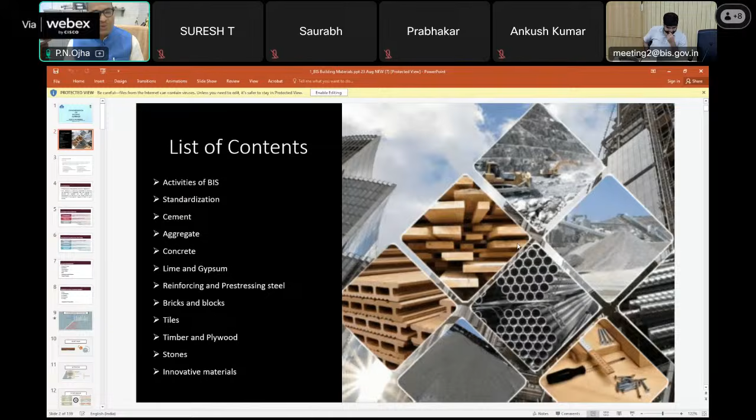So building materials covers numerous types of building materials, and so many standards are available. So I would like to cover everyone so that the participants can read on their own all those standards and can apply them in real life situations. So with this background, activities of BIS, everyone can read it. This slide will perhaps be shared by the BIS to everyone, so I'm not going to read it.

But yes, standard formulation is one of the major activities of BIS. And then BIS has a laboratory recognition scheme also, product certification also, compulsory registration scheme. Apart from this, foreign manufacturer certification, hallmarking, laboratory services, Indian standard sale, then consumer affairs activity and training services and information. All these activities are part of BIS.

So what is a standard? Let's suppose a product is having some desirable properties and some undesirable properties. So those standards, in terms of a quantitative value most of the time, or even if qualitative based on some colors and all that, the desirable and undesirable properties are listed with their values. If it is a desirable property, then it should be more than that. And if it is an undesirable property, then it should be less than that.

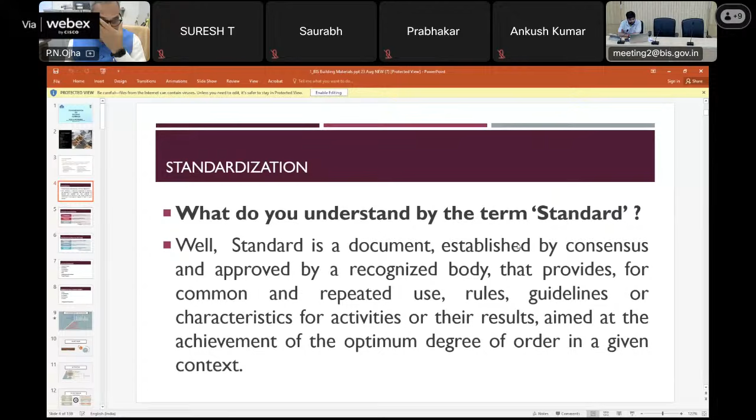So this is the meaning of a standard. When you are using it, those specifications will have to be met, and whether it is meeting them or not, the product will be tested as per a specified test method. These specifications and test methods are available in a standard form to everyone on the same platform, and that's why it is called a standard. One can read this language, but this is the meaning of standard in practical terms.

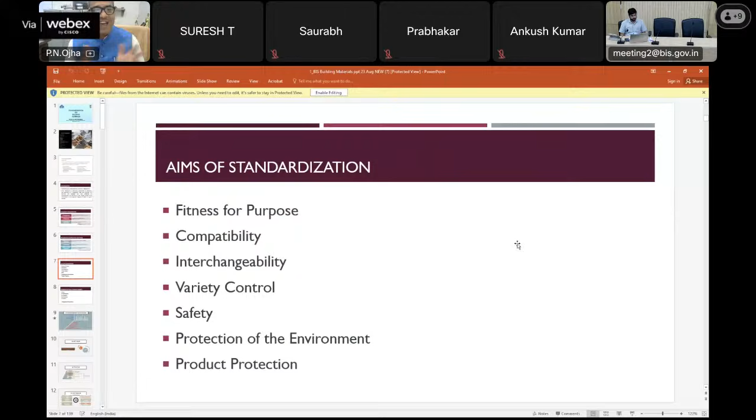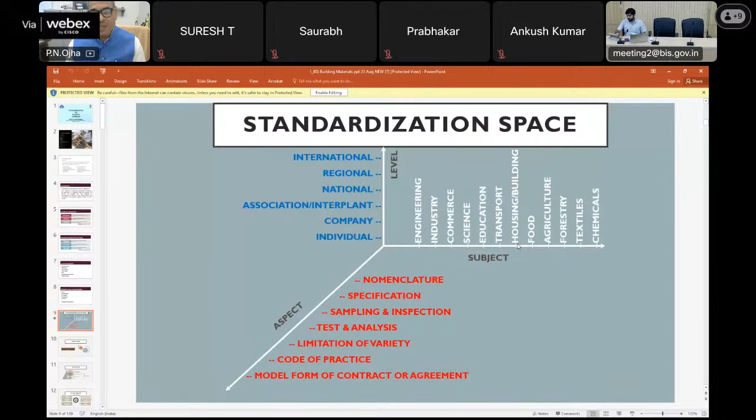Okay, so standardization should have transparency, openness, impartiality and consensus, then effectiveness and relevance, coherence, and development dimension. And the aims of standardization are fitness for purpose, compatibility, interchangeability, variety control, safety, protection of the environment, and product protection. National standards benefit technologies, products, consumers, and traders. So I'm going through all these things quickly.

I am coming to the Civil Engineering Divisional Council. All the civil engineering committees come under this Civil Engineering Divisional Council, CEDC, and yearly or twice a year a meeting happens on in which area which type of standards is needed.

So all the experts from all fields of civil engineering sit together, have the meetings and debate, and based on the consensus view, the standardization framework and future plans are made. So it is the utmost body, CEDC, which gives the suggestions and opinions on in which area the standards are to be made.

Okay, so these are the committees available in the Civil Engineering Divisional Council, right from CED 2, 3, 4, 5, like that. So we have a number, and within this committee, we have a panel. Let's suppose cement and concrete. So we have cement, then concrete. Concrete has various products like aggregate and all that. For standards, let's suppose aggregate has specification, test method, and all that. So we have a panel who will deal with the aggregate. A panel deals with IS 456. A panel deals with the chemical admixtures, like that.

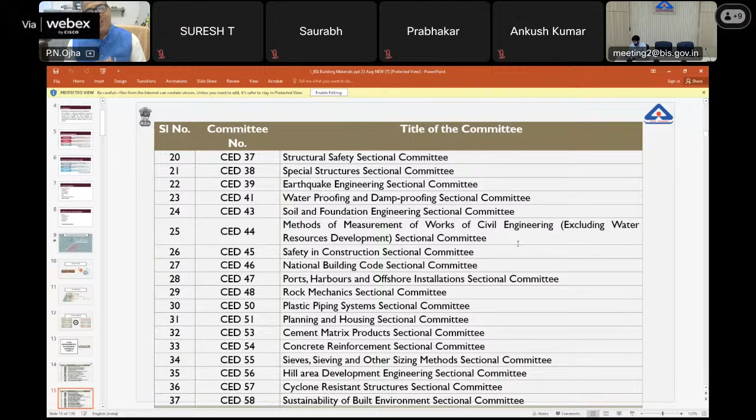So every committee has some panel, and a panel can formulate a working group for a particular standard to be drafted or to be revised, like that. So a standard must be needed, implementable, timely, acceptable, and it should be current.

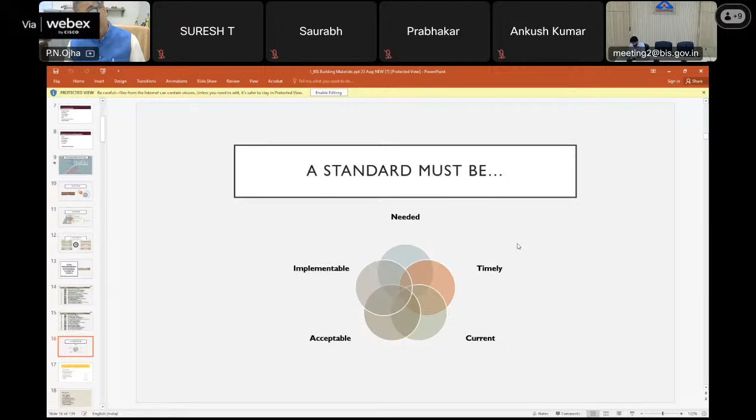So any building material has some properties which we can call physical or mechanical properties. And physical and mechanical properties are the performance in the civil engineering structure. For those performances, let's suppose cement strength or fineness, these are the mechanical or physical properties. And the reason behind those physical properties is the chemical composition.

So when we have any standard, there are some physical properties, their values and their test methods, and there are some chemical properties, their values and their test methods, how they will be determined. Some products should be durable in nature, so durability properties also. And the fourth type of property is how it looks, so general appearance.

And then for testing those products, how the laboratory sample should be picked up. Let's suppose a heap or 1,000 items are there. How many items, and how they will be picked for testing, that is called sampling for conformity. And conformity means when it is tested, it should meet the standard. So sampling for conformity is also available in the product standard.

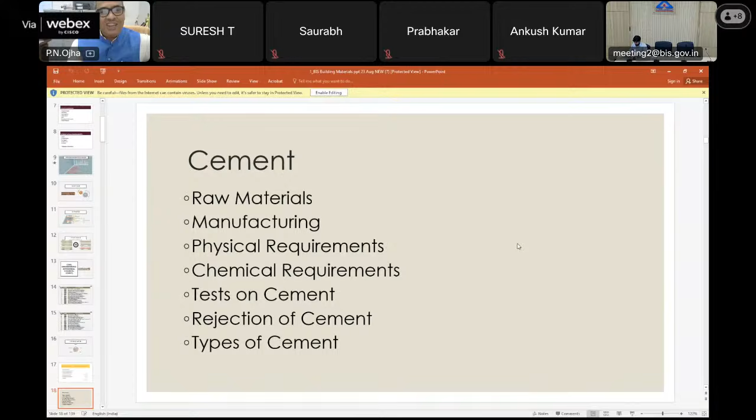And how the sampling will be taken, those are also there - how the bag of cement, what should be the volume of the bag of cement, how it should be sampled out of the available bags. All these clauses are there in each of the standards pertaining to the cement for each type.

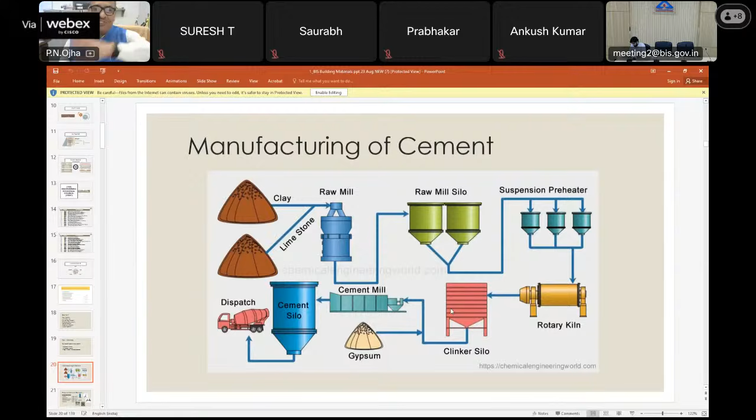And requirement of cement, as I said, five physical property - these are fineness, setting time, compressive strength, transverse strength, soundness. These are the test methods: IS 4031 part 2, part 5, part 6, part 8, part 3. The various parts of IS 4031 are available for physical property or mechanical property, both we can say.

So physical properties of cement - these are the IS 4031 series, the standard test methods for testing physical properties of cement.

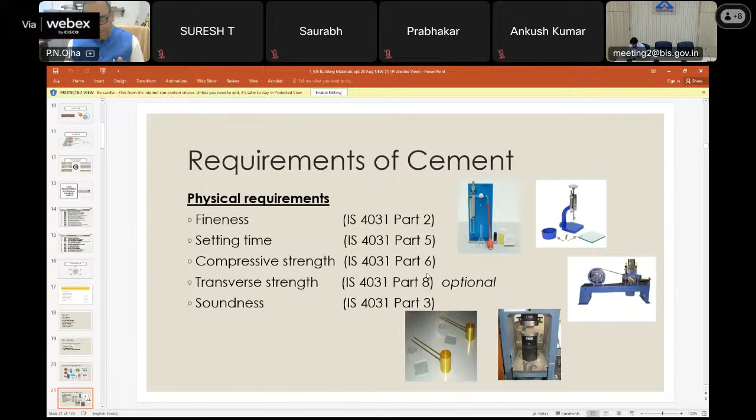And IS 4032 is the test method standard for testing chemical properties of cement in terms of LSF, insoluble residue, magnesia, sulfate content, loss on ignition, chloride content, alumina, iron oxide, etc.

Okay, so this is the specification standard, those are the test standard. This is the specification standard for OPC, IS 269. Those values are mentioned - one can see it in this standard. Open it out and see.

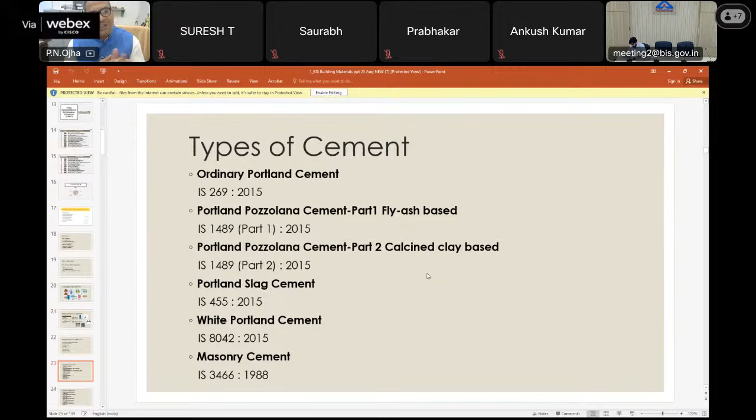Then IS 1489 for PPC, which is calcined clay based, and earlier part 1 was fly ash based cement, which is mostly available in India. Then Portland slag cement IS 455, white Portland cement IS 8042, and masonry cement IS 3466. It is rarely manufactured - manufactured by cement plants on demand.

Then sulfate resisting Portland cement IS 12330, high alumina cement for structural use IS 6452, super sulfated cement IS 6909, rapid hardening Portland cement IS 8041, high alumina refractory cement IS 15895, hydrophobic Portland cement IS 8043.

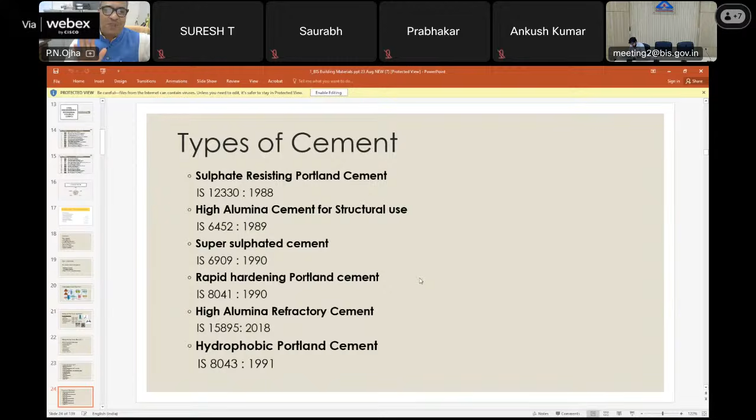So all these are the specification standards of cement of various types. Again, the list is low heat Portland cement IS 12600, oil well cement IS 8229, composite cement IS 16415, microfine ordinary Portland cement.

IS 16993, Portland calcined clay limestone cement, IS 18189. So all these are the specifications of cement.

And rejection of cement, as I said, cement is supplied in bulk storage and bulk bag, but when non-compliance with relevant standards, then it can be rejected. If it is more than 3 months, it should be tested again, and if it is not meeting the criteria, it must be rejected. So these are the rejection criteria mentioned in the specification standard.

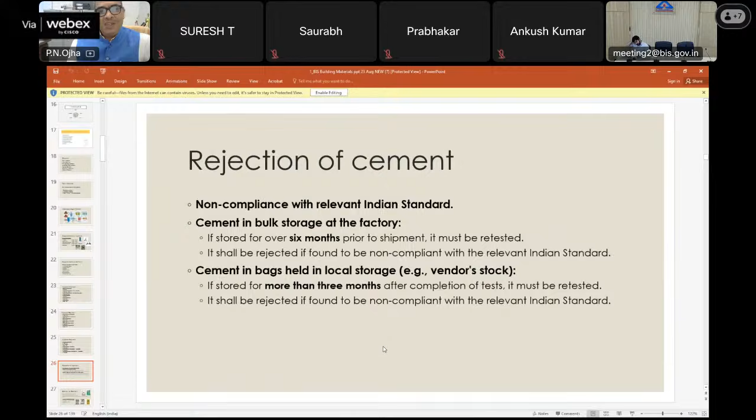And delivery of cement, generally 50 kg bag, but sometimes 25 kg, 10 kg, 5 kg, 2 kg, 1 kg are also in standard. But this happens in case of white cement, generally not in case of gray cement.

Printing of the type of cement - if it is black color, you can see it is in case of OPC and white cement. In case of PPC, the writing should be in red color. This is very, very important to recognize from a distance.

And in orange color, when it is PSC, you can see the bags and the writing color on the bags. So one can recognize which kind of cement, which type of cement is in the bag right from a distance - you will not have to see which kind of cement it is.

So, and the bag should have on each bag the week, month, and year of packaging before the best before date. This should be there, so one can easily recognize when this cement has been manufactured and which type of cement it is - one can recognize from the bag.

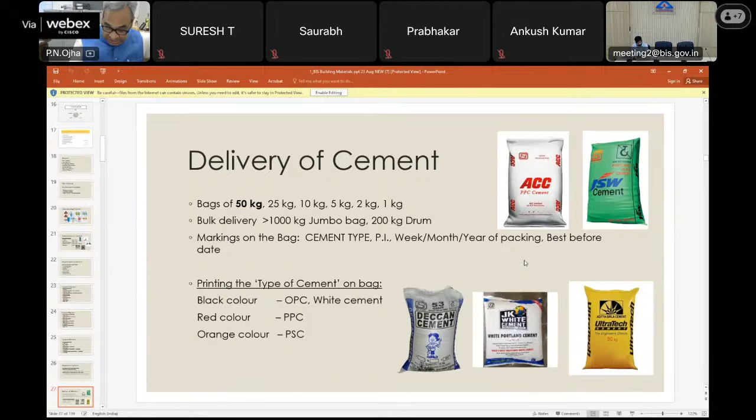So now coming to the second material of concrete, aggregate. Aggregate is of two types. We can see coarse aggregate and fine aggregate based on the size, but based on where it is coming from, aggregate can be from natural sources and aggregate can be from industrial byproducts or C&D waste or some industrial process.

So we have classified in the coming standards of aggregate. We are revising the standards on aggregate, and we have defined the type of aggregate based on the sources - natural aggregate and aggregate from other than natural sources. And lightweight aggregate is altogether a different category, which is light in nature.

And waste-based aggregate is not the right word here. We can call it industrial byproducts. C&D waste now is not a waste, it is a resource material. When we are processing the C&D waste, those aggregates are being called C&D waste-based aggregate, RCA and RMA, like that.

So IS 383, presently IS 383 2016 defines the coarse and fine aggregate both, and this covers all the properties. But for your information, IS 383 is being revised. It will be available in 3-4 months. It is in the last stage of revision. I am the convener for that revision.

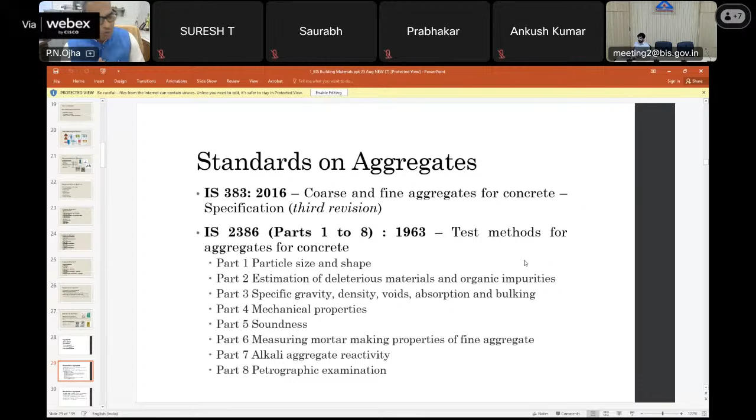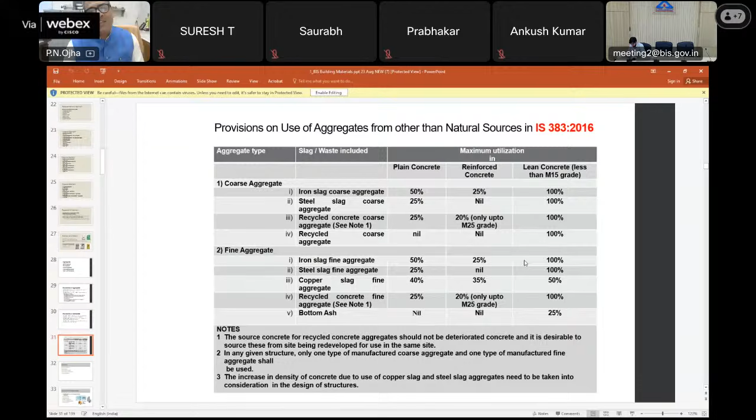Now, concrete mix proportioning. So the aggregate is there, then cement is there, we have discussed. Then chemical admixture - for your knowledge, there is a standard for how to evaluate the chemical admixture, and that is IS 9103. 9103 is also under revision, and right now it is available in one part.

After revision - revision has just started - it will come in 7 parts, and it will cover right from the super plasticizer to air entraining agent to accelerator, retarder, set retarder. Then we can call it shrinkage reducing agent, then corrosion inhibitor, then permeability reducer. So all these types of chemical admixtures will have a specification, test method, and evaluation process for how it should be evaluated.

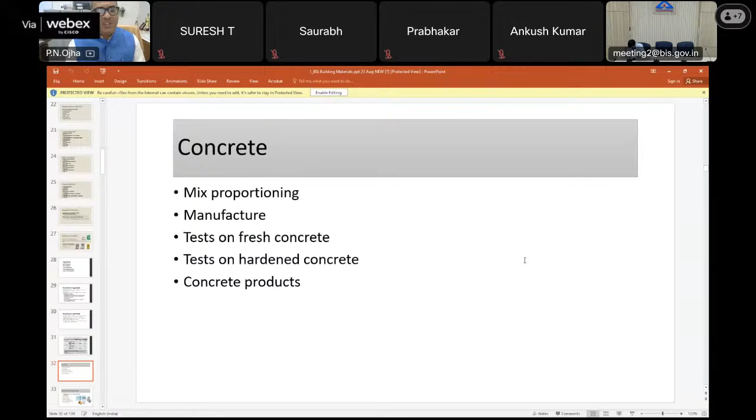So that chemical admixture, cement, and aggregate combined together - we are going to make concrete. So how to mix proportion, how to decide the mix proportioning, how to manufacture the concrete, what are the tests on fresh concrete property, what are the tests on hardened concrete property, and how concrete products are made - this is the thing.

IS 10262 is the method for concrete mix proportioning. IS 10262 2019, and it covers the test mix design procedure for ordinary grade, standard grade, high strength grade, self compacting concrete, mass concrete, all this.

So how the water cement ratio will be decided, how the target mean strength calculation is done, then according to the target mean strength, how to select the materials, then water cement ratio, then calculation of water, then calculation of cement, then calculation of volume of aggregate separated in two parts - coarse aggregate, fine aggregate - multiplying by specific gravity, coming to the quantity of fine aggregate, quantity of coarse aggregate, then calculation of all those components, then casting the cube, then looking at it to see whether it is meeting the requirements.

All these procedures are mentioned in IS 10262 for all types of concrete, and based on that, this is a guideline. This is neither the specification nor the test method. It's a guideline for concrete mix proportioning. It is not strictly to be followed, meaning a little bit of deviation will not mean concrete doesn't pass or concrete fails. It is not like that. That's why it is being called a guideline for concrete mix proportioning.

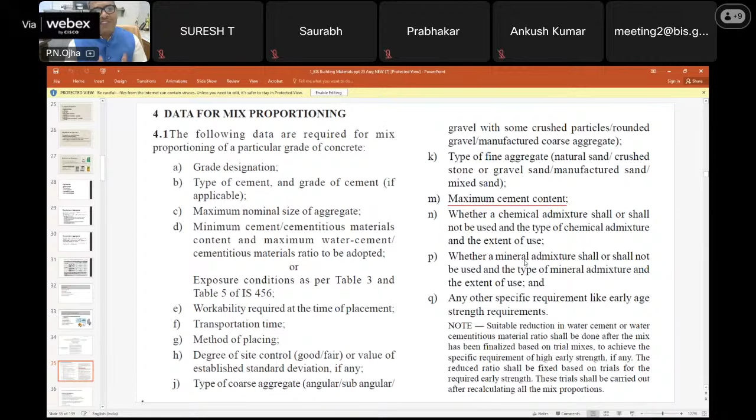This is the steps you can go through. I have already explained selection of water cement ratio, air content, then water content and admixture content, then cement and cementitious material, coarse aggregate proportion, then different coarse aggregate fraction, then estimation of fine and coarse aggregate, then trial mixes. Illustrative examples are also mentioned at the end of the standard guidelines. Following this, one can design the concrete mix proportion.

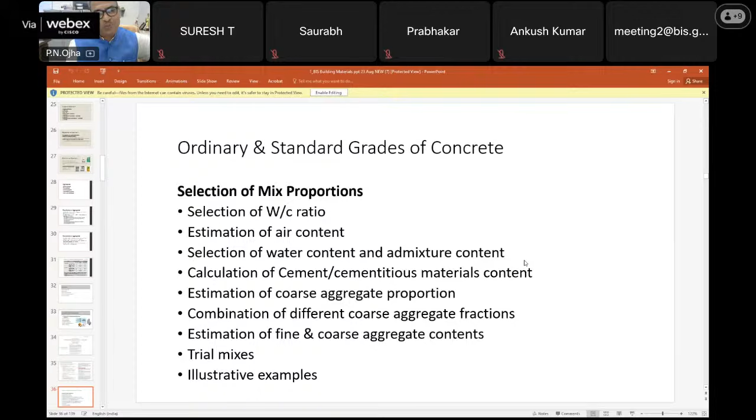For high strength grade, a little bit different how to select the materials, but the procedure is almost the same, with a little difference in the values, in how to select.

This is self-compacting concrete. The features are passing ability, which is tested as per L-box - there is a standard available in IS - and filling ability, segregation resistance, and viscosity. These are the four properties available in the fresh concrete state for any self-compacting concrete.

According to this, when a self-compacting concrete is made, the trial is made after calculation and following IS 10262, then these tests are done in the fresh state. When these are not meeting the specifications fixed by the user, there should be adjustment in the concrete mix proportion like this. How the mix proportioning should be done, the approach has been written in 13 steps, and one can follow.

The premise of IS is that the fine content should be in the range of 400 to 600 kg per meter cube of concrete. What is the fine content here, or powder content? It's the materials finer than 0.125 mm. Water content should be 150 to 210 for self-compacting concrete to be designed. It is essential to use high range water reducing admixture when designing self-compacting concrete. But only when anyone actually designs it will they understand the tricks and art of designing self-compacting concrete.

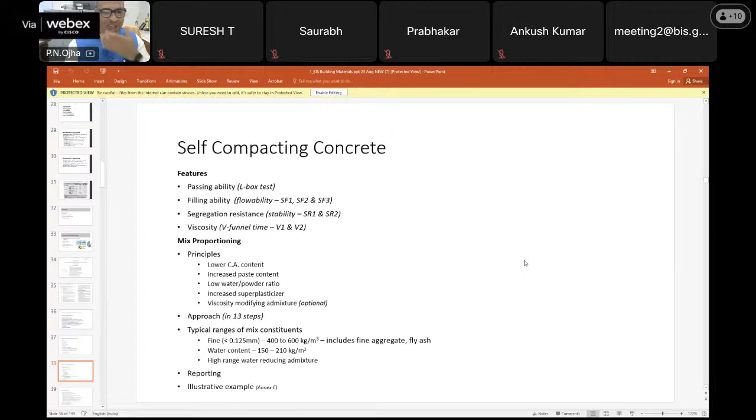For mass concrete, again the procedure is almost the same, but one thing is different. When the maximum size of aggregate is 80 mm or 150 mm, for target strength calculation, FCK plus 1.65 into standard deviation, whatever comes will be multiplied by a factor - 1.2 for 80mm, or 1.25 for 150mm - to achieve the concrete mix which is sieved on the 40 mm sieve, because we cannot cast a cube of 80 mm or 150 mm maximum size of aggregate, and testing facility will also not be available. So cubes are cast after mixing, after removing the 40 mm plus aggregate from the concrete mix.

This is the difference. Other things are almost the same, but only when one designs it will they understand the difference in mass concrete. One more restriction is there should be sufficient mortar content when 80 mm plus or 150 mm plus maximum size aggregate is designed.

Especially these types of concrete are used in dam construction. Mass concrete is also used in high thickness foundations, like if a foundation of a 100-story building has 2-meter thickness or 1.5-meter thickness, that can be called mass concrete, and that becomes tricky because of the temperature generation in the core of concrete. How to control the temperature - all these tricks and arts, all these standards are available. One will have to study mass concrete in detail.

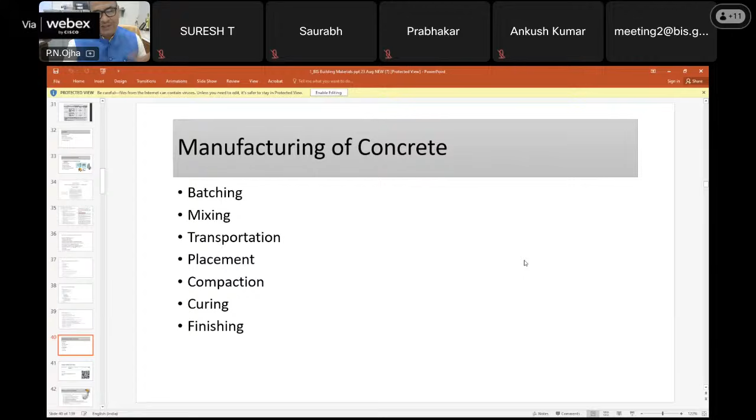So ready mix concrete, we have a standard IS 4926, but ready mix concrete is nothing but concrete produced in the batching plant. If I am selling the concrete, I have a batching plant, but I don't have a project, I am selling the concrete for individual house builders or any project, then that plant is called a ready mix plant. And if I have my own project, and for my own project I have a batching plant, then it is called a batching plant.

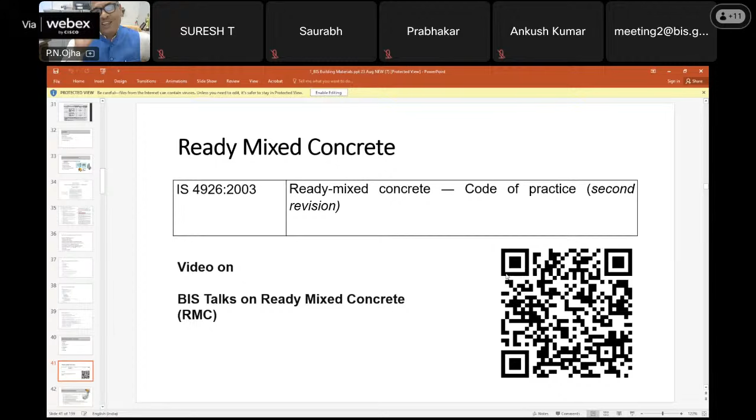Okay. So how the concrete is manufactured, a little bit of other terms, the quality control and all those things, are mentioned in this standard. So one can go through IS 4926. This is specifically the ready mix concrete standard, but it is not a specification standard. Again, this is a code of practice. You see, ready mix concrete, code of practice. It is not a specification standard. As I said, standards are of three types: specification, test method, and code of practice or guidelines.

Okay. So right now this is fresh concrete, how to test the fresh concrete for various properties, because fresh concrete properties are very, very important. So sampling, then consistency of fresh concrete, density of fresh concrete, air content, then making and curing of test specimens, then self-compacting concrete fresh properties, as I said, passing ability, segregation resistance, all those properties we have in part 6. Then part 7, setting time of concrete by penetration resistance.

In part 8, water soluble and acid soluble chloride. This standard is under development. I am the convener for this also, IS 1199. So we are working on this. And then analysis of freshly mixed concrete. This is also under development. Okay. So one will have to see these standards to test the fresh concrete properties. And how it looks like, one can see part 1, then part 2, one should go through it.

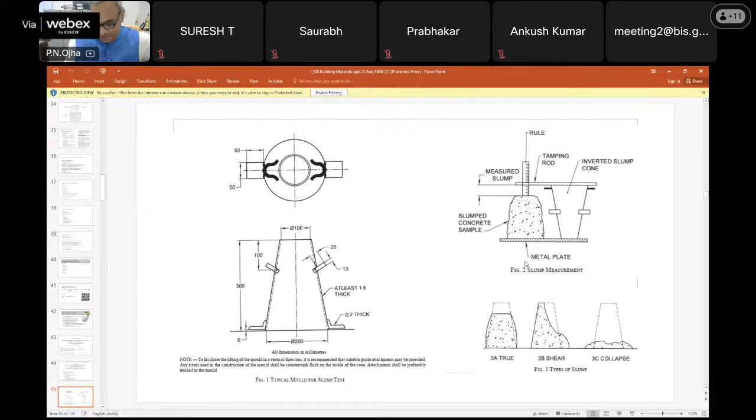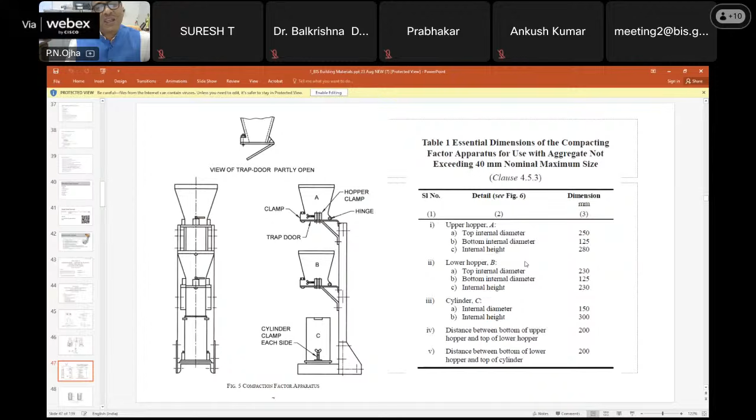Then this is slump, how the slump is measured, when it is called true slump, shear slump, and collapse. So one can see, and one should relate these figures when you are testing in the laboratory or at site. Okay. So this is a Vee-Bee consistometer. When the concrete doesn't have a flowable property, almost dry in nature, the slump test is not a valid test. So we test it with the Vee-Bee consistometer test. And this is a compaction factor test. Normally these tests are not being used nowadays.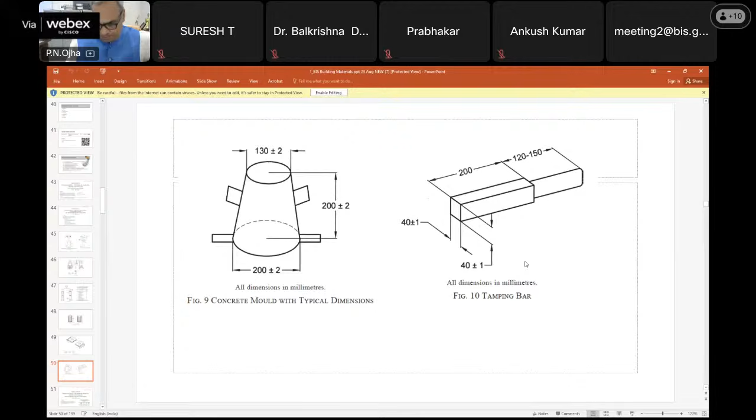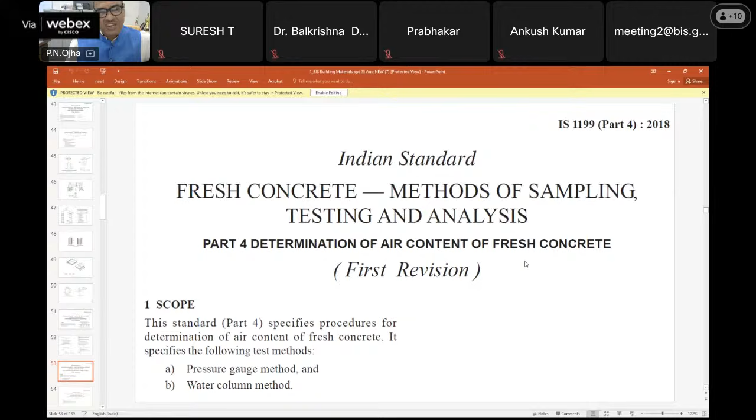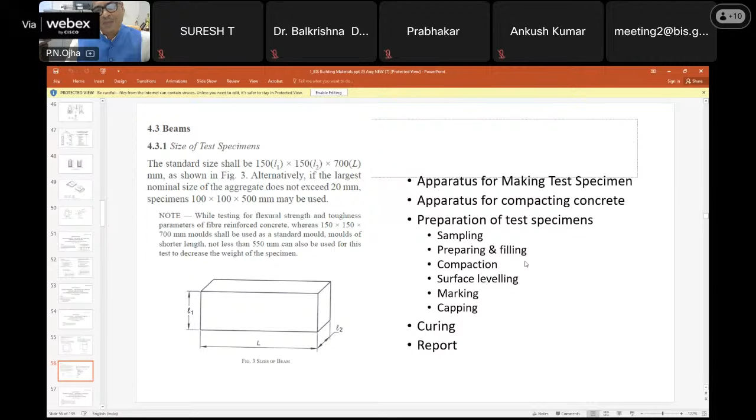Then making and curing of test specimens, part 5, how the cube specimens are made, how the cylinder specimens are made, how the curing is done for the specimens. These are very, very important while making any concrete structure. Then tests on fresh self-compacting concrete, various tests, then setting time of concrete, penetration resistance, and then tests of hardened concrete. So these are the set of tests.

One is testing of strength of hardened concrete, and these tests are compressive strength, flexural strength, and split tensile strength. Then other properties like density of hardened concrete, then depth of water penetration test, initial surface absorption test. This is one of the durability indicators. The earlier one, the water penetration test, is also a durability indicator. Oxygen permeability index, this is also a durability indicator test. Then determination of carbonation resistance. Carbonation is one of the problems of concrete from a durability point of view. Okay, so carbonation resistance test.

Then part 3 explains making, curing, and determining compressive strength of accelerated cured concrete. So when we want a prediction of 28 days strength early, within 2-3 days, we have an accelerated test, and there is a method. This is under development right now. This standard is available for OPC only, and it is very, very old. So we are going to revise it. I am also the convener for IS 516, so we are doing it in the committee. And how to sample, prepare, and test concrete cores, this is also available. And various non-destructive testing for evaluation of concrete structures.

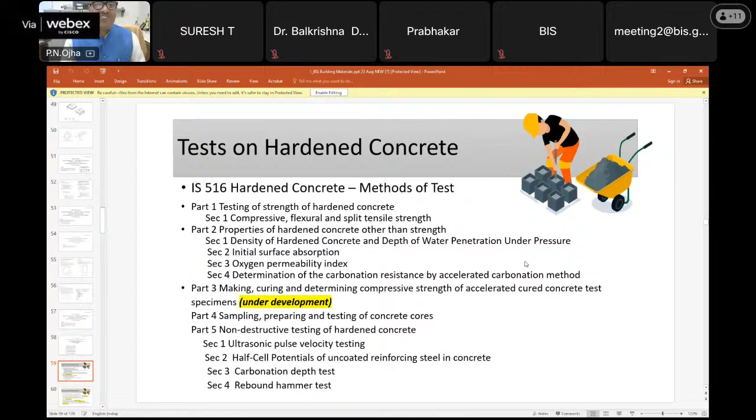And the rebound hammer test is based on the rebound from the concrete surface, and to some extent it can be related to the strength of concrete, but it should be interpreted along with the UPV and the core test. So this rebound hammer test: how to do it, how to make a grid, and how to interpret the results. For all these tests, a series of IS 516 standards is available.

Okay, and this is the hardened concrete method of test. One is drying shrinkage and moisture movement. Second one is creep of concrete. Creep is an important property. This is also under development. We have a standard on how to determine modulus of elasticity, and we have static modulus of elasticity, but section 2 is under development.

Determination of wear resistance, this is also under development. Determination of bond in reinforced concrete, bond of reinforcing bar, which is a very, very important property. This is also under development. And determination of Portland cement content. It is an ambiguous issue whether we will be developing it or not, but this is also under development.

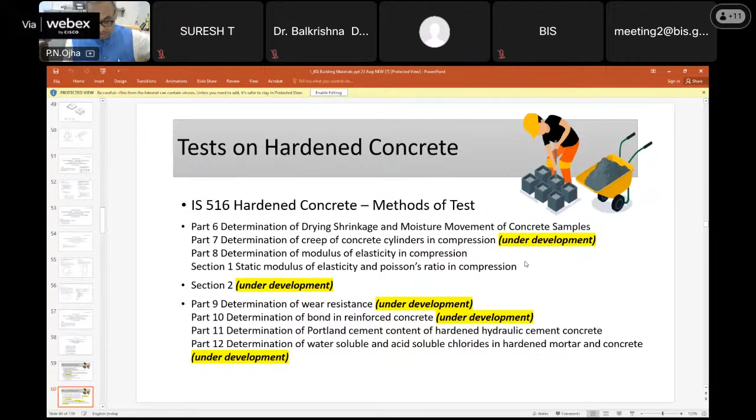And determination of water soluble and acid soluble chloride in hardened concrete. A standard is available, but this is also under development because it is not being used properly. Okay, so this is the set of the IS 516 series. So this is how these tests look, as I have explained. This is the first page of each one, so one can go through these standards.

Test methods. And concrete is mostly used in residential buildings, dams, reservoirs, bridges, foundations, high-rise buildings, rigid pavement, RCC paving blocks, concrete sandwich panels, etc. Okay, but concrete is concrete. It can have a difference in fresh concrete property. It can have a difference in hardened concrete property. Hardened concrete property means strength and strength-related properties.

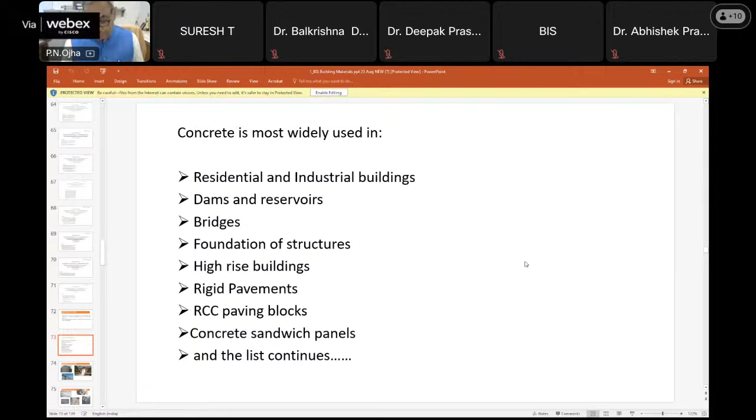What is strength? You know, clear strength, and strength-related properties mean creep, elastic modulus, Poisson's ratio, drying shrinkage, all those things. And what is the durability property? All those things may differ, but concrete is used in all these applications. Application of concrete: dam.

Now come to the other part. Concrete is over. If anyone has questions, one can ask. It is going to be 5 o'clock. I will have to complete in half an hour.

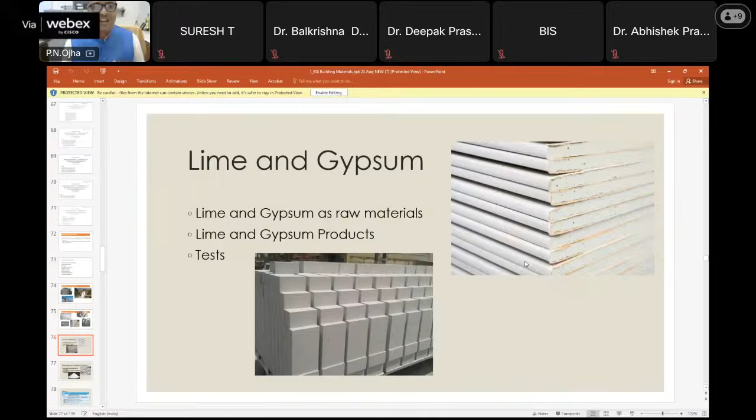So lime and gypsum. This is also raw material for producing different products. We have a set of specifications, and it has a separate committee. Whatever I have discussed till now comes under CED 2. Lime and gypsum come under a different committee, and it has standards such as the specification for building lime and byproduct gypsum for construction. So we have a separate standard for that.

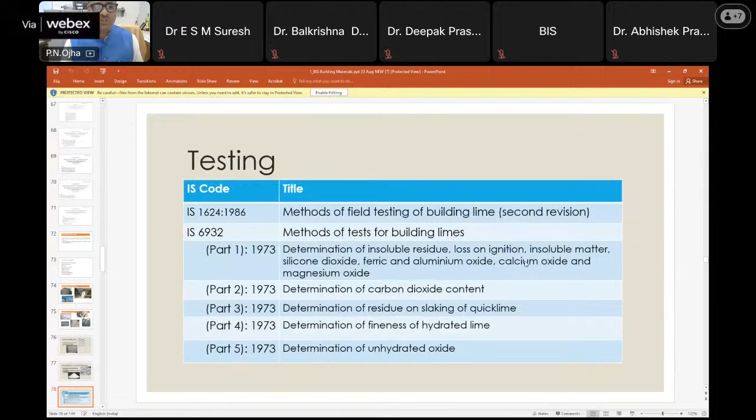And gypsum board you might have seen, and gypsum is also used in cement making, as I have explained. So we have standards for all those things. These are the testing methods, separately, because lime and gypsum have to be tested in a little bit different way. So we have a set of tests, just like for cement we have 4031 and 4032. Okay, so one can see this: part 1 to part 11 we have the test method.

And separately we have IS 2542 part 1, section 1 to section 14. So here we have the series for gypsum plaster, concrete and products, method of test for plaster and concrete. And then other 4 standards: 4098 for specification of lime pozzolana mixture, 3115 for lime based blocks, 4139 calcium silicate bricks, and 15648 pulverized fuel ash for lime pozzolana mixture application. These are specification standards, not test method standards.

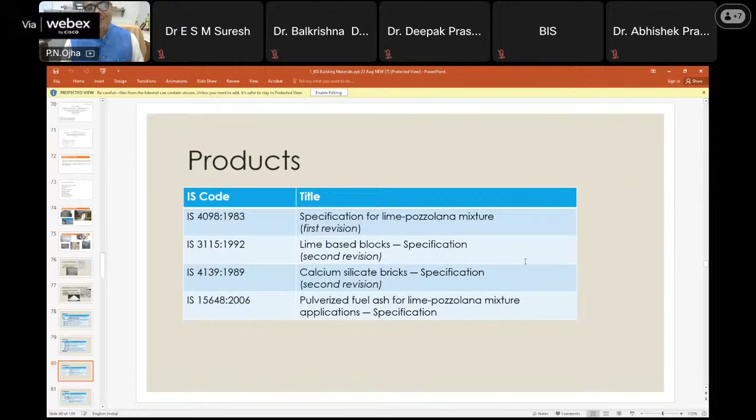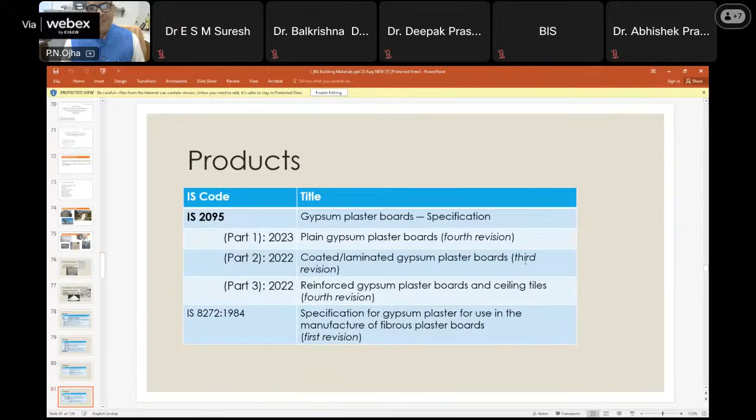And the other part is IS 2095 part 1, part 2, part 3: plain gypsum plaster board, coated laminated gypsum plaster board, and reinforced gypsum plaster board. So this committee also has products in it, and these are the specifications of the products. And IS 8272, a specification for gypsum plaster for use in the manufacture of fibrous plaster. Those 3 are without fiber; if we add fiber, it becomes fibrous plaster. Okay, and now we come to bricks and blocks.

So what is the raw material, manufacture, dimension, physical test, chemical test. There are a variety of bricks, and we have a specification for all of them, and a variety of blocks, so concrete blocks also. So this is another CED, civil engineering division.

And these are the bricks: IS 1077 common clay bricks, which we usually see. Then burnt clay hollow bricks, where there is a hollow space inside the brick. Then a specification for sewer bricks, a specification for burnt clay soling bricks, then burnt clay fly ash building bricks specification. Then IS 12894 pulverized fuel ash lime bricks, 16720 fuel ash cement bricks, and 1725 stabilized soil blocks used in general building construction. So these are all the specification standards.

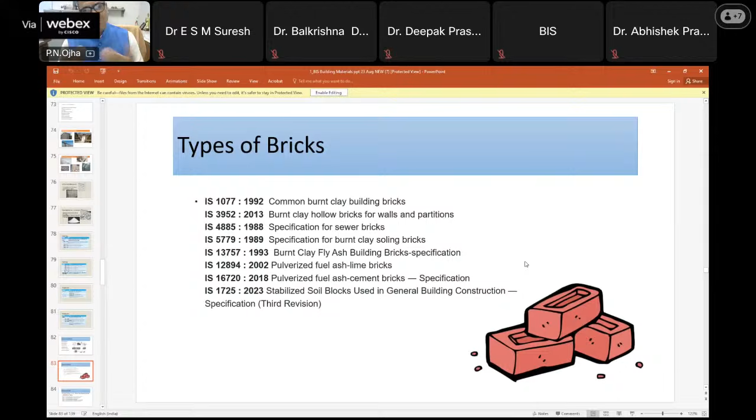And test methods are mentioned, particularly which test is to be done, in the specification itself. Wherever a separate standard is available, a separate test method is there. But if a separate test method is not available, test methods are attached in the appendix of every one. So a specification and some test methods also.

Now IS 3495 part 1 to 6, burnt clay building bricks method of test. As I said, these test methods are available separately from part 1 to part 6 for various properties: compressive strength, water absorption, efflorescence, warpage, initial rate of absorption, and modulus of rupture. So these are the tests on burnt clay bricks. We have a set of standards for test methods, and the values are in the specification standard.

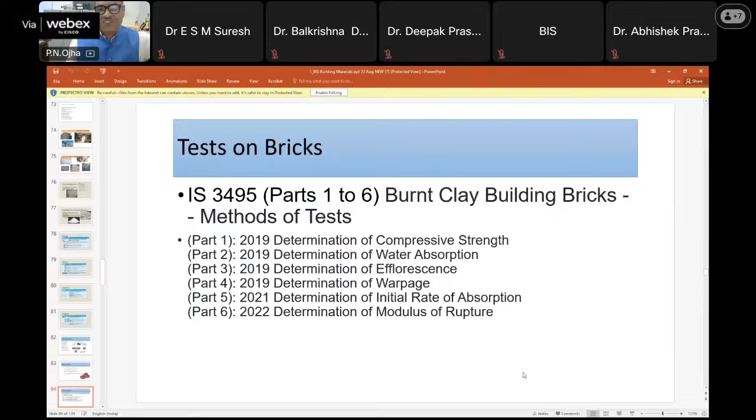Then tiles. We have different types of tiles: ceramic tiles, porcelain tiles, mosaic tiles, etc. They can be glazed or non-glazed. So a variety of tiles is available, specification standards are there, and similarly test method standards are there, and one can follow them for a particular type of tile. So you can see there is a standard for roofing slate tiles.

Another is 2690 burnt clay flat terracing tiles, part 2 handmade, and IS 3951 hollow clay tiles for floors and roofs. IS 3367, burnt clay tiles for use in lining, irrigation and drainage works. IS 13317, clay roofing country tiles, half round and flat tiles. So these are the specification standards for these types of tiles.

And not only the tile standards, there should be 2-3 slides more on tiles. There are test methods, and there are glazed tiles, ceramic tiles also. Since this is not exclusively being covered, one can go through it. Okay.

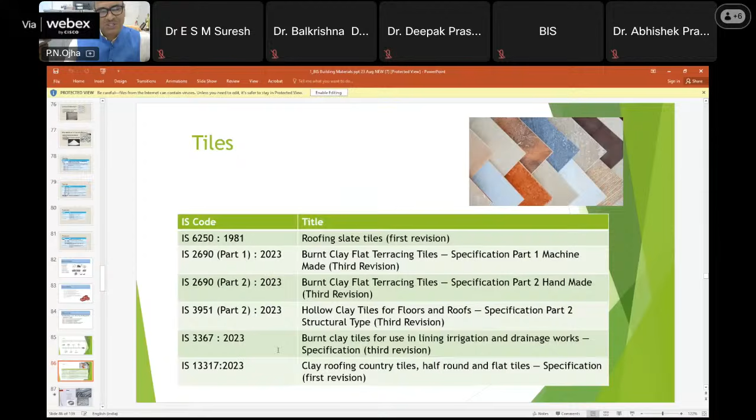Steel can be reinforcing steel for concrete. Steel is used in pre-stressing, so pre-stressing steel, and there are methods of testing. The third use of steel is directly as structural steel, and then how it is manufactured and what its mechanical properties are. So we have CED 54 dealing with steel, a separate civil engineering division which works on the formulation of standards for all three: reinforcing steel, pre-stressing steel, and structural steel, and test methods also.

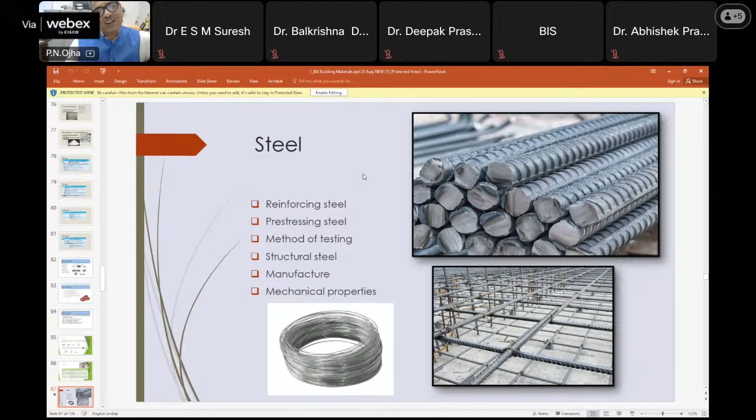Now, recently we have formulated a standard for glass fiber reinforced polymer bars. That is not steel, but it also comes under CED 54. So reinforcing steel can be mild steel or HYSD bar, and how it looks like. So IS 432 part 1, IS 432 part 2, and IS 1566 1982. All these are under revision.

The most important one that generally comes across to us while construction is taking place, particularly reinforced concrete, is IS 1786 2008. This standard is available, but it is also under revision. Very shortly a new standard will be there, which will not be clumsy. I am a member in this. So it is being revised in a simple form, and soon it will be available for use. But this is very, very important.

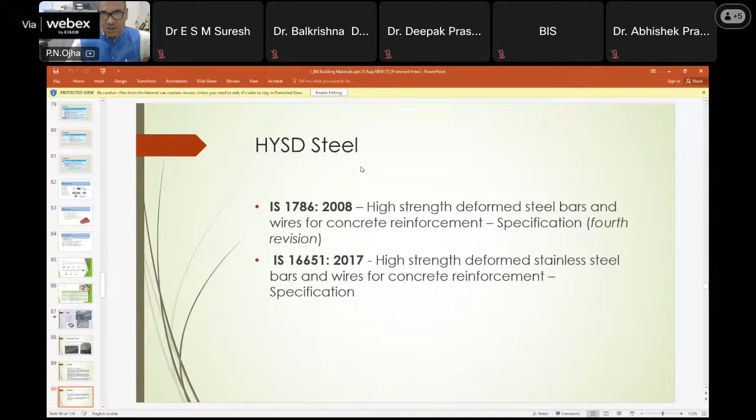Now, 13620 fusion bonded epoxy coated reinforcing bars. Methods of joining steel: welding, for which there is a standard IS 9417, and mechanical couplers. So there are two ways of joining reinforcement: one is welding, the second is using a coupler. For couplers, we recently brought a standard, IS 16172, in 2023.

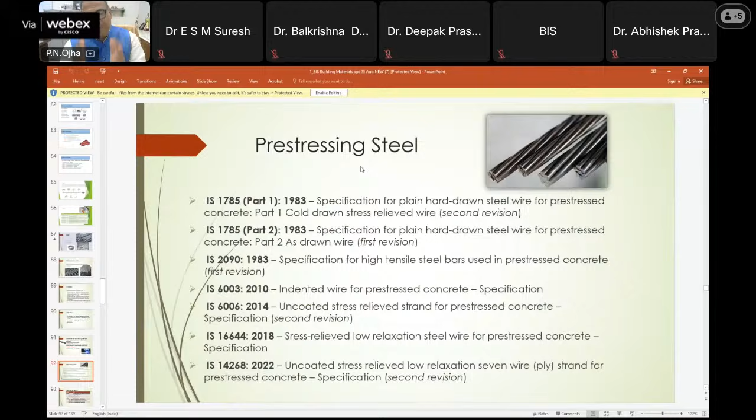And then for pre-stressing steel, we have IS 1785 part 1, part 2, then IS 2090, IS 6003, 6006, 16644, and 14268 for various usages. One can go through them because there are small differences in each of them. And then method of testing, which is very, very important. IS 10790 is the method of sampling of steel for pre-stressed and reinforced concrete. Part 1 is for pre-stressing steel and part 2 is for reinforcing steel.

So, 10790. And the series of IS 1608, the metallic material tensile testing, particularly this is tensile testing. Part 1 deals with the method of test at room temperature. Part 2 deals with method of test at elevated temperature. And part 3 deals with the method of test at low temperature.

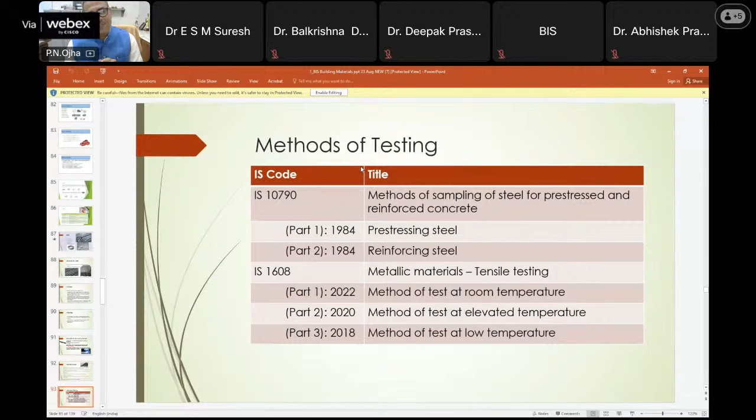So what do you mean by tensile testing? Means ultimate strength, tensile strength, yield strength, and elongation. So all these, elongation at peak stress, all these parameters are available while adopting this test method IS 1608. Okay.

IS 800. Now coming to the special publications for steel, SP6 part 4, use of high strength friction grip bolt, part 5, cold formed light gauge steel structures, and part 6, application of plastic theory in design of steel structures. Okay,

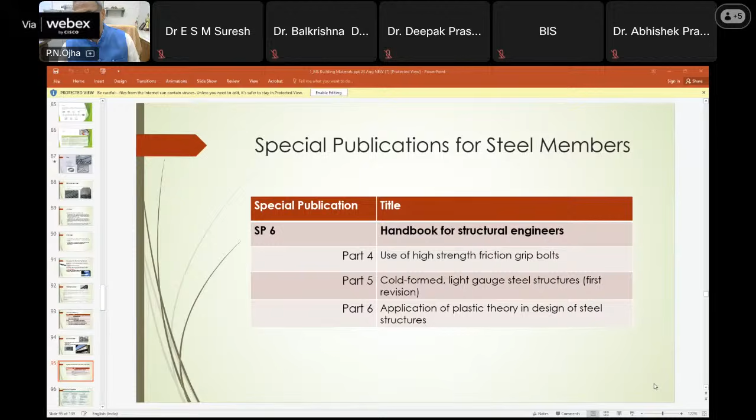Now, other, as I said, IS 432 part 2 and IS 1786, there is a comparison, but first and second is also under revision. IS 1786 is also under revision. So let us not compare it right now. Revision comes. 1786 will come very soon.

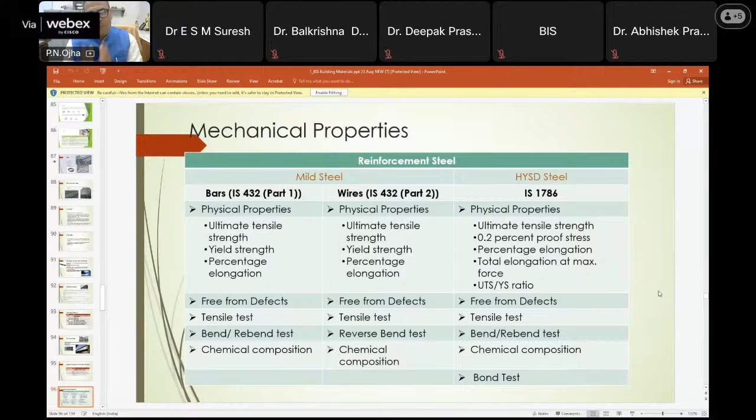Wires, we have a standard IS 6003, and strands, there is a difference between wires and strands. Strands are pre-stressing strands, and one bar can be called bar, and strands can be a set of wires. Okay.

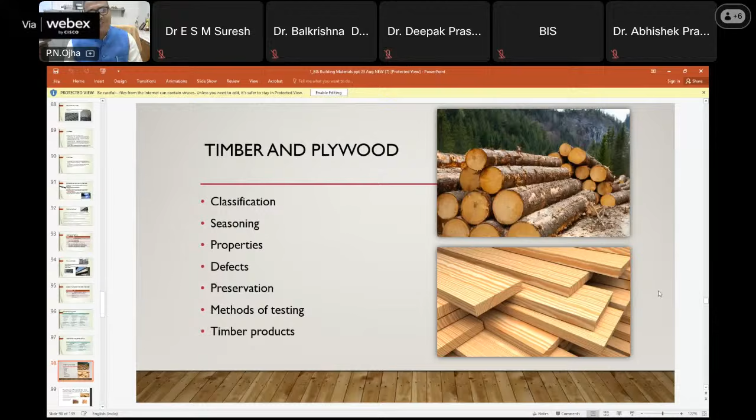Timber, we can deal with classification, seasoning, properties, defects, preservation, method of testing, and timber products. I am not so expert in this area, but in any case, we can make furniture, light packing cases, heavy packing cases, agricultural implements, and turnery articles and toys, veneers and plywoods.

Veneers and plywoods we are frequently using in our home. And plywoods are also used for shuttering purposes, like that. So we have a use of timber for different purposes. And seasoning, we have a standard for seasoning, 1141 1993.

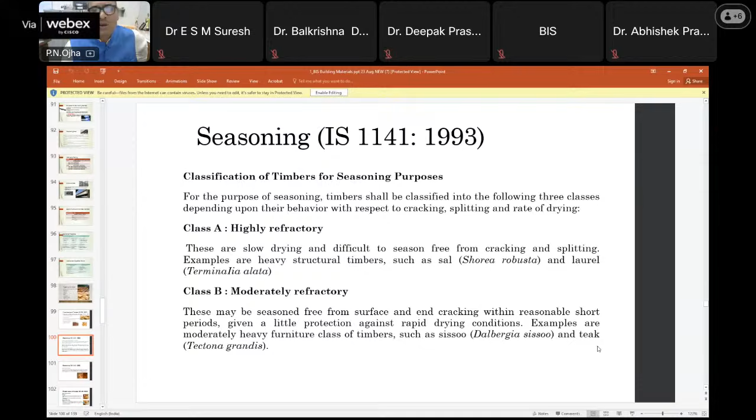What is seasoning? Seasoning is when raw wood is taken from the tree, then it will have to be seasoned so that it should not be used immediately. If it will be used, it will not be the same while being in service. So any timber should be seasoned properly, and type of timber and seasoning process has been given in IS 1141. Okay.

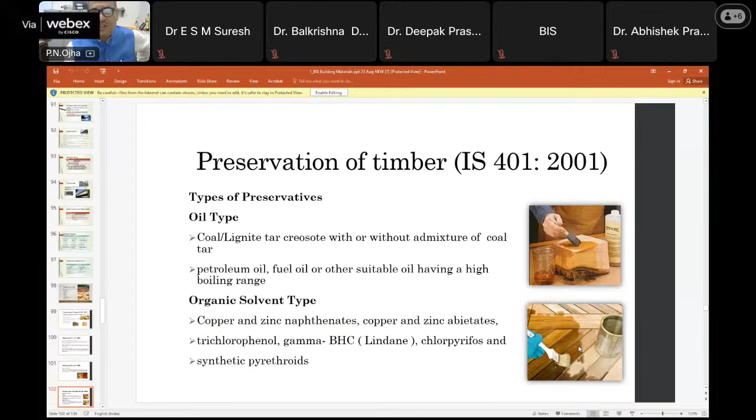Then preservation of timber. How to preserve those timber? IS 401 standard is available. We have IS 401 preservation of timber, IS 10013 specification for water soluble type wood preservatives. So there are preservatives to be used: part 1 acid copper chrome, part 2 copper chrome arsenic, and part 3 copper chrome boron.

And IS 10753 is used as a code of practice for preservation of wooden sleepers for railway track. Earlier wooden sleepers were used, but right now we are not using wooden sleepers. So this standard is almost not being used right now because we are not using wooden sleepers. Okay. IS 9096 preservation of bamboo for structural purposes.

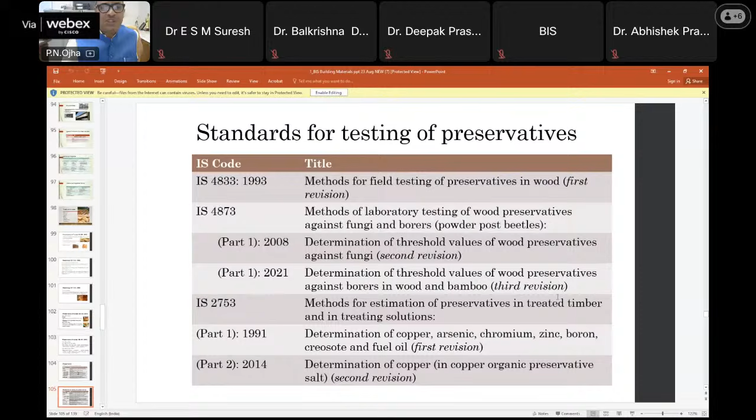Now bamboo is being used in different usages. So use of bamboo has increased. Government has given thrust looking at its production in the Northeast. So use of this standard has increased. And we have other standards for testing of preservatives. IS 4833, 4873, 2753 part 1, part 2, all these standards are available.

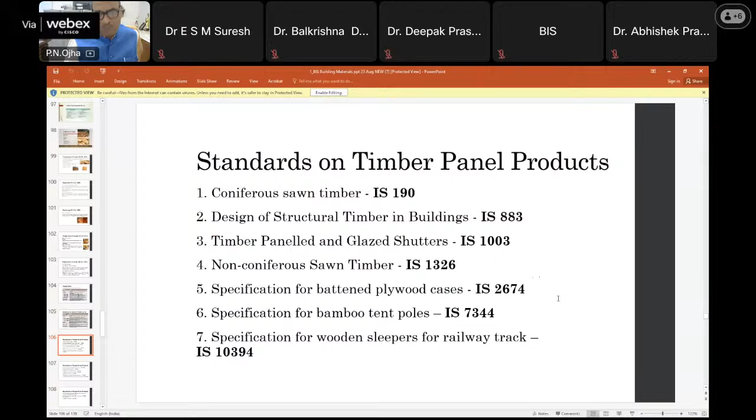Timber panels, IS 190, IS 883, IS 1003, IS 1326, IS 2674, IS 7344, and a specification for wooden sleepers 10394. And again, I am not reading the names. These timber panel products have different bamboo mat veneer, bamboo mat board, timber door, BWP grade bamboo. All these standards are available.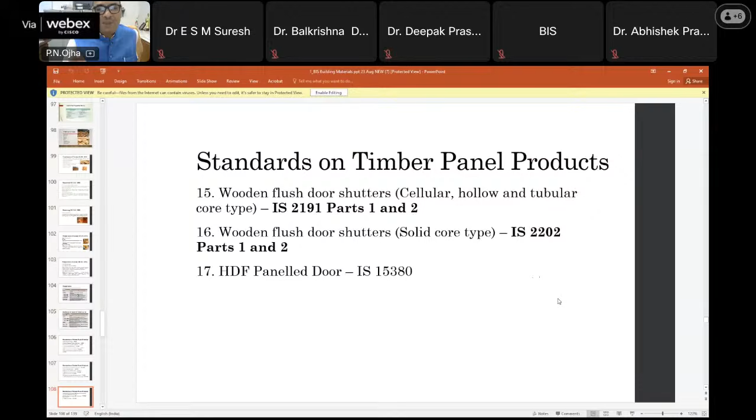Okay, and flush door shutters are being used, and there are test methods also. Wooden flush door shutter, HDF panel door, all these standards are available.

Now coming to the stones, so this comes under a different civil engineering division, CED 6 perhaps. So there are series of specification standards for limestones, for marble, for structural granite, for laterite stone block, for sandstone, for coarse aggregate, for water-bound macadam, as I said. This is the test method we discussed earlier also.

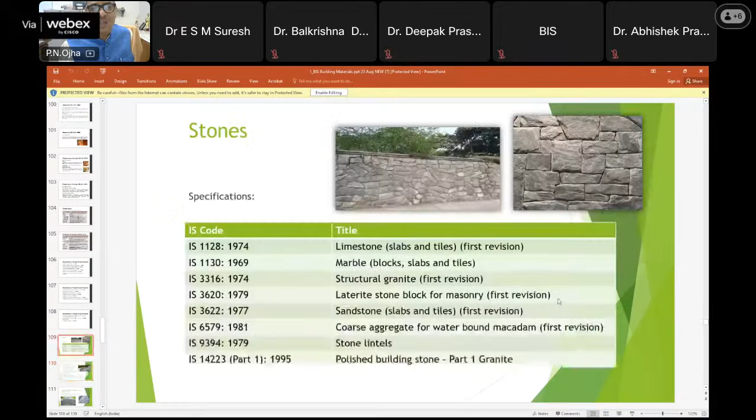And stone lintels. Earlier, lintels were made with stones, and polished building stone, part 1 granite. So for polished building stone, polishability and shining capability is also measured. So part 1, and this is how to test the compressive strength of a stone, transverse strength, tensile strength, shear strength. All these are test method standards.

True specific gravity, water absorption, weathering, durability, abrasion resistance, water transmission rate, surface softening. All these parameters are important. If you see the specification standards for different types of stone, different values are there. How will they be determined? These are the test method standards.

Then permeability, toughness, aggregate impact value, and stripping value of road aggregates. This test method we have discussed. It is for bituminous concrete.

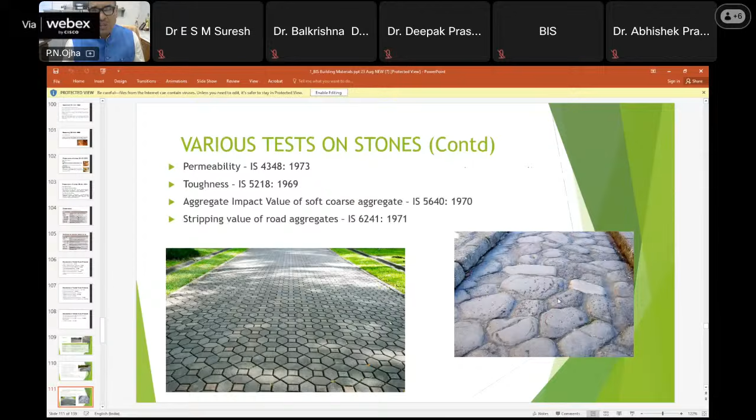Okay. Then glass. We have glass. Glass is a material which looks like the same, but it has a different use. Glass can be used in the buildings for general purposes, general methodology for selection. Glass can be energy and light, can be transmitting and all those. So this has a different IS 16231.

Then fire and loading point of view, and then safety related to human. So all these part 1, part 2, part 3, part 4 are important. I'm not the expert of this area. But from thermal comfort point of view, from fire rating point of view, when it is being used in buildings, from safety point of view, all those criteria, the specifications are mentioned, and there are test methods also.

So there should be some more slides about the test method and all that, but one can go through it. The National Building Code, which is just about to come in 2-3 months, we are working on it. So this has specifications mentioned in detail. And now coming to the innovative materials.

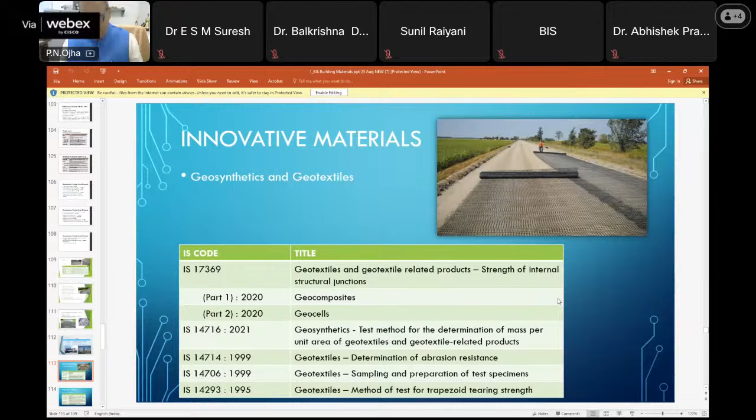And 14714 geotextiles determination of abrasion resistance. 14706 geotextile sampling and preparation of test specimen, how to take the samples. And then 14293 method of test for trapezoidal tearing strength; it is one of the mechanical properties. And 14715 jute geotextile strengthening of subgrade in roads specification, this is a specification standard.

And part 2 control of bank erosion in rivers and waterways, this is also a specification. So these specifications are in terms of physical property, mechanical property like tear strength and tensile strength, or strength related properties. And this 14986 guidelines for application of jute geotextiles for rainwater erosion control in road and railway embankment and hill slopes.

And 15869 textiles open weave coir Bhoovastra specification, first revision. Then geosynthetics for highway specification. So in highway, we have a lot of specifications, and geosynthetics means all types I have explained: 1-dimensional, 2-dimensional, 3-dimensional, and different types. And then geosynthetics, geotextile used as a protection or cushioning material, IS 16090.

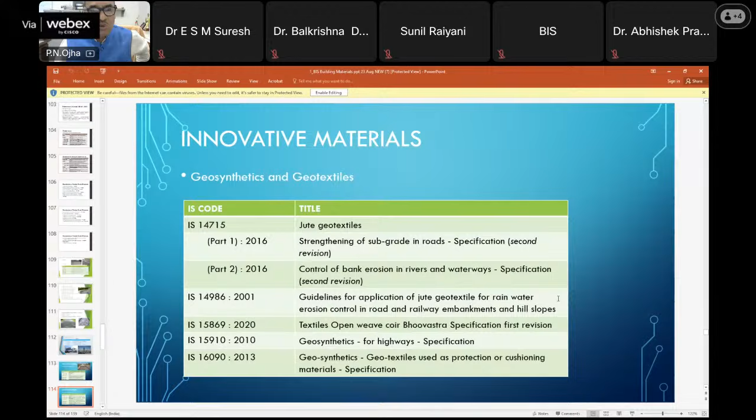Then 16352 geosynthetics, high density polyethylene HDPE geomembranes for lining specification. Then geosynthetics as a geotextile used in subgrade stabilization in pavement structure.

Geosynthetics, geotextile used in subgrade separation in pavement structure. Sometimes it is used as a separator, sometimes used as a drainage layer. There, drainage is allowed where we want to separate; these geomembranes are used. So it is based on the application.

Then it is called geosynthetics, geotextile for permanent erosion control in hard armor system. Then geosynthetics, geotextile used in subsurface drainage application, as I say. And then geosynthetics, needle punched non-woven geobags for coastal and waterways protection. So these are the

differences in terms of specification and their values, and they are determined commonly from the same type of test, and the values are compared as per the application specification required, and then we can say whether there is conformity or not according to the values of those tests.

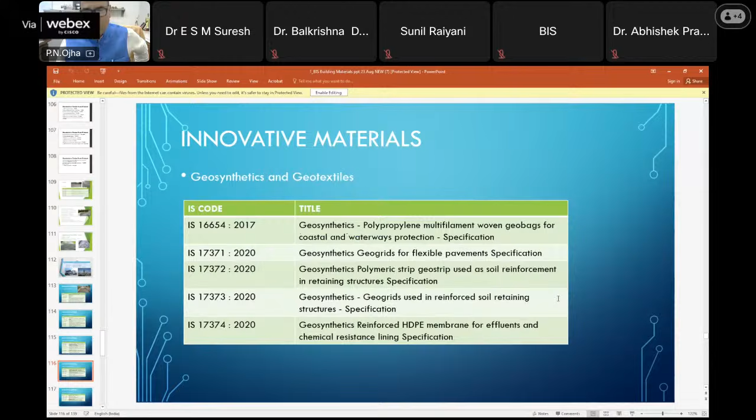Geosynthetics reinforced HDPE membrane for effluent and chemical resistance lining specification. So all these geosynthetics are used. Geosynthetics as geocells specification, then load bearing application and slope erosion specification. So it has two applications, and there are different specifications for these two applications.

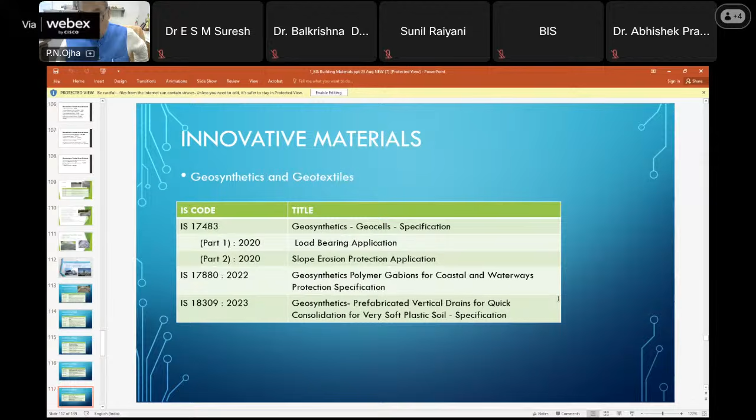Then 17880 geosynthetics polymer gabions for coastal and waterway protection. Then 18309 geosynthetics for prefabricated vertical drain for quick consolidation for very soft plastic soil. So all these are about geosynthetics.

Then geosynthetics can be natural geosynthetic, or can be polymer based geosynthetics, like polypropylene, HDPE, etc. And IS 15643:2000, non-destructive examination of polymer based composite materials, you can see.

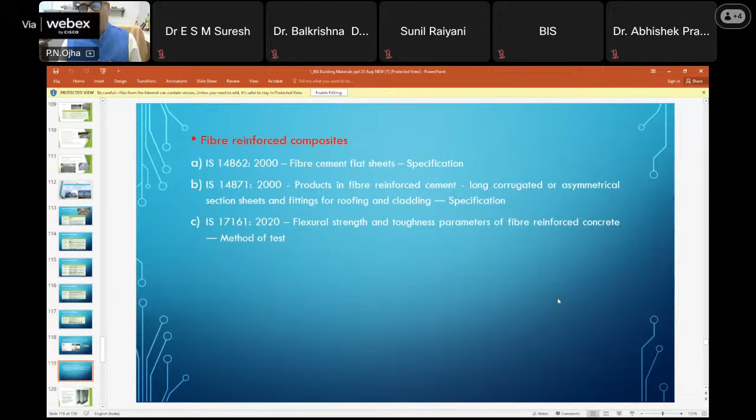And then fiber reinforced composite IS 14862, fiber cement flat sheets; we have a specification IS 14871:2000, products in fiber reinforced cement; IS 17161, flexural strength and toughness parameter for fiber reinforced concrete. This is the method of test.

And we have National Building Code, volume 1 and 2, NBC 2016, which has 13 parts, but right now we have perhaps 16 parts or so, I don't remember right now. So it has more parts right now, but some parts have been added this time when it is being revised. So these are the structure of the earlier, meaning the existing National Building Code, but it will change.

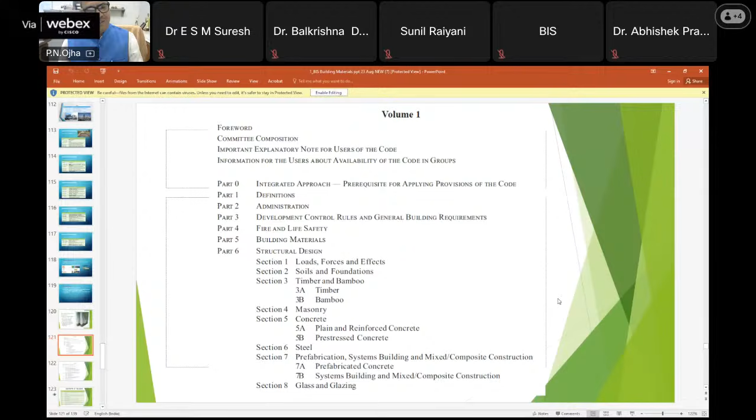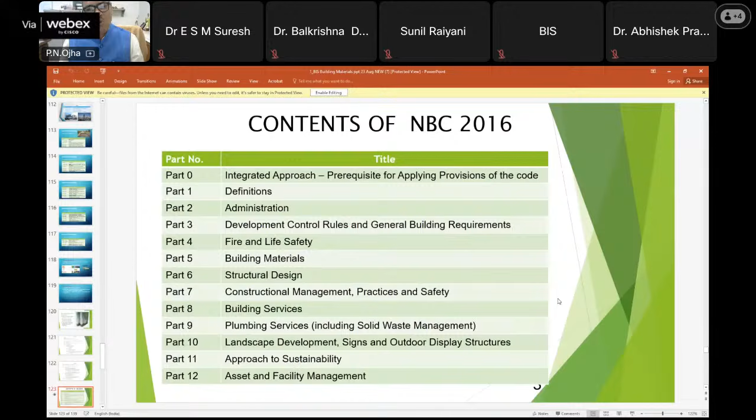Of course, the new National Building Code is coming up, so I'm not going through all these details. One can read it out on their own. Okay, these are the various parts, from part 0 to part 12.

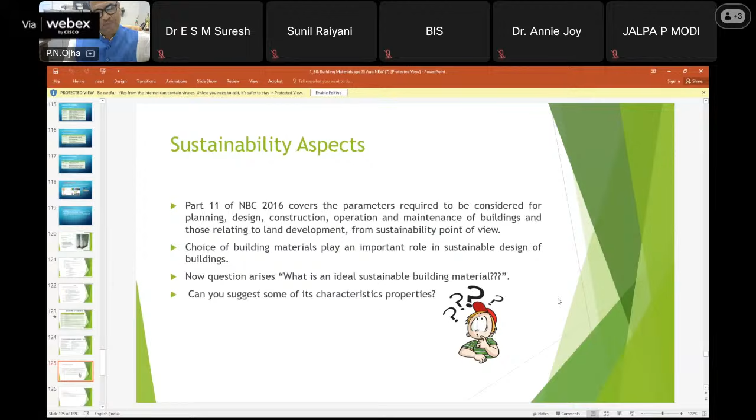For the new and alternative building materials and technology, the following parameters shall be taken into account: structural stability, durability, acoustics - all these things are coming, available in the National Building Code. Sustainability has become very important; there was a separate chapter available in the existing National Building Code also, but this time it is coming in a broader way, more explicitly explained and able to be applied in a real life situation.

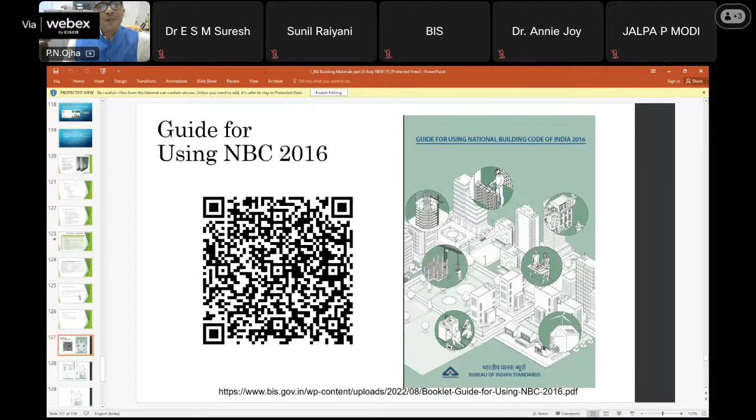So this is the barcode one can use to see the different parts of National Building Code, how it looks like.

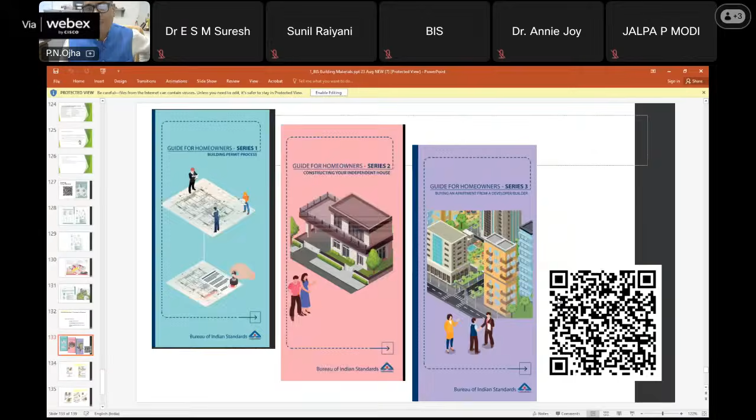So these are the links available, and these are the other series of booklets available from BIS: Guide for Homeowners, Guide for Homeowners Series 2, Guide for Homeowners Series 3. All these booklets and leaflets are available from Bureau of Indian Standards for individual house builders.

So I think I have come to the end of this. So thank you very much. I have gone through very, very fast. I could have gone into the details, particularly in my subject area which is of my interest, but due to the paucity of time, this much would have been able to be done. Thank you very much from my side.